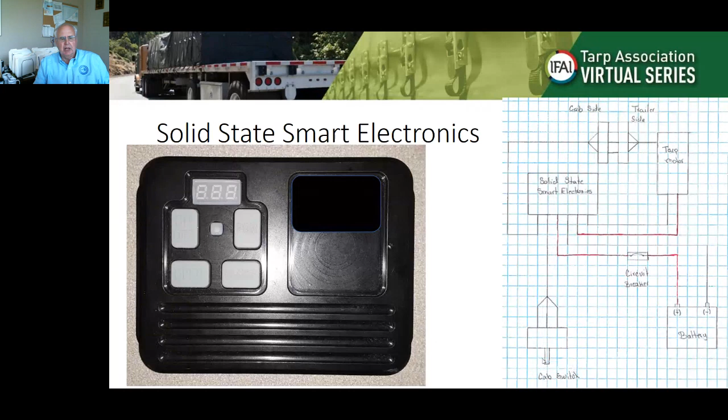Features that you might want to consider if you choose to purchase or sell one of these: you want a good distance for your RF control. You want an auto shut off feature so that if somebody accidentally gets on the button, it automatically shuts off. A feature you might want to consider is pulse counting through Hall effect sensors, and we'll go into that later, how that works. The ability to have an optional cab switch to control the system. Current sensing and adjustability—this is how we turn on and off as we sense the current.

The control board is sealed from outside, so you want it to be potted and weatherproof in a very tough cover. You want a robust motor and very good power wired connections. Solid state switching—you want to look for a MOSFET, so you really don't want any relays because they wear out. A MOSFET is just a bridge of transistors.

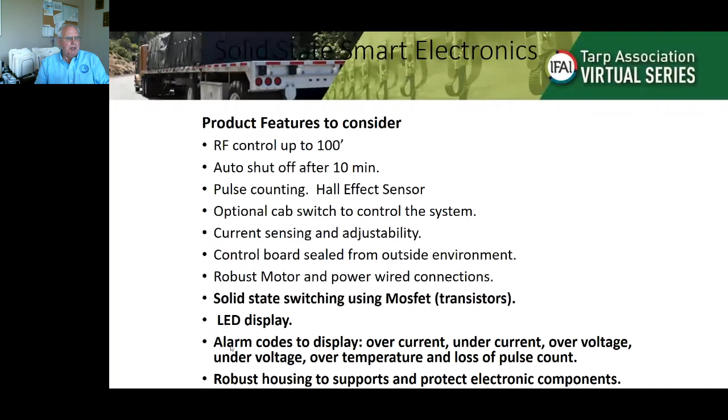You'd like to have an LED display that can tell you when things are going wrong and help you when you program. The LED display also allows you to see alarm codes, so if you're overcurrent, undercurrent, over voltage, under voltage, it helps determine the problem if you're having one.

So that's that. And then as far as advantages to explore when you're looking at these, look for something that's easy to install, with an integrated current sensor—you don't want a separate current sensor that you put over the wire because you can install that wrong, so you want that to be integrated. You want it to be easy to program. You want the error codes, as mentioned before, for easy troubleshooting of problems. You want the solid state—this is kind of redundant. You want good RF performance, and you want an RF handset that can work with multiple trailers for different customers that require that.

As far as the systems we'll talk about: side-to-side systems, front-to-back, roll-off container, rolling system, a glass covering system, cable system, and the high-side open-top flips.

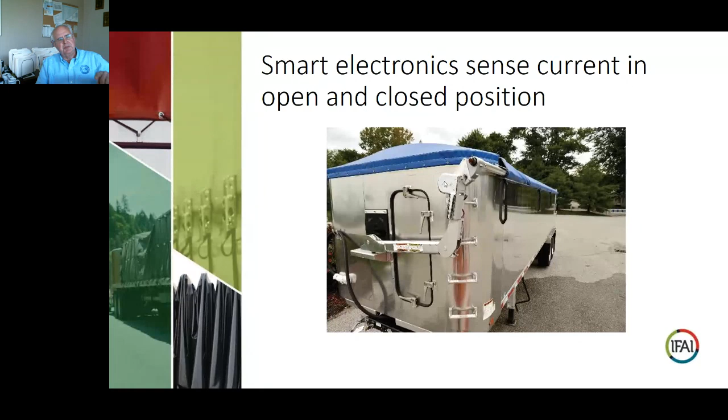The smart electronics here: when you go into a covered position, the motor pulls a lot of current, and we're measuring that current through our smart electronics. That's how we know to shut it off. It works kind of like your garage door—you push the button and it automatically either goes to the closed position and stops, or it goes to the unclosed position and stops.

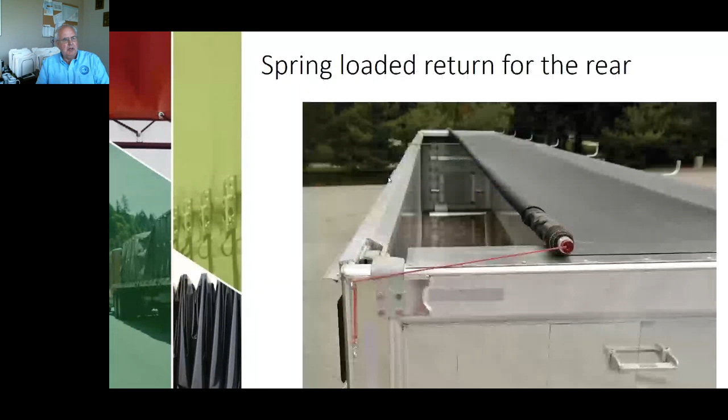In these applications everyone's aware, but this is a view from the side of the trailer. The arms of these have to be able to take a barn door. The spring-loaded returns are also kind of nice, and people are aware of those.

We also have our side dump applications. A lot of good products out there in the side dump market—about 90% mesh on this market, we estimate. The smart electronics does the same as it does on the side-to-side: it will hit that point where you start to spike the current, and once the sensor sees the uptick in current, it shuts the system off.

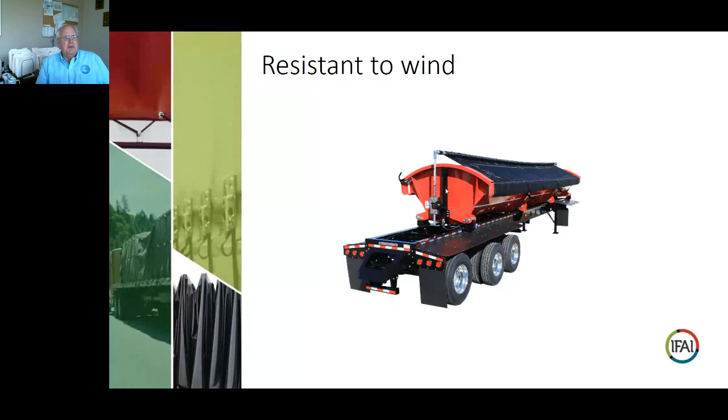You want to look for these guys that are wind resistant because they see a lot of wind, they want to pull them up. You make sure your system can allow dumping in both directions because people want to dump in both directions.

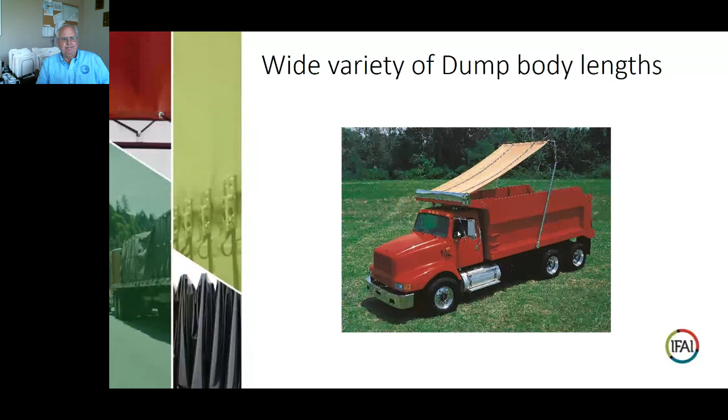On the front to back systems, wide variety of lengths. These things will go 53 feet for like a high side open top trailer. You'll have a front to rear for a 15-foot truck body.

On these it's a little different because when you deploy in the covered position, you don't have a current spike—there's really no difference in current for the motor. So what we do is count the rotation. Our electronics counts the rotations of the motor. The motor has a little Hall effect sensor, and then it has a rare earth magnet, and every time that rare earth magnet passes the Hall effect, it's counting the rotations. So when you program it, you let it know how far it needs to go out to be in the covered position.

In the uncovered position, you can fall back to the current sense. The nice thing about the current sense is when you got your finger on that button, you really create a lot of stress and damage to the tarp and the system. So by having the current sense, you never get that condition where you're getting really high torque out of the motor that's really damaging stuff.

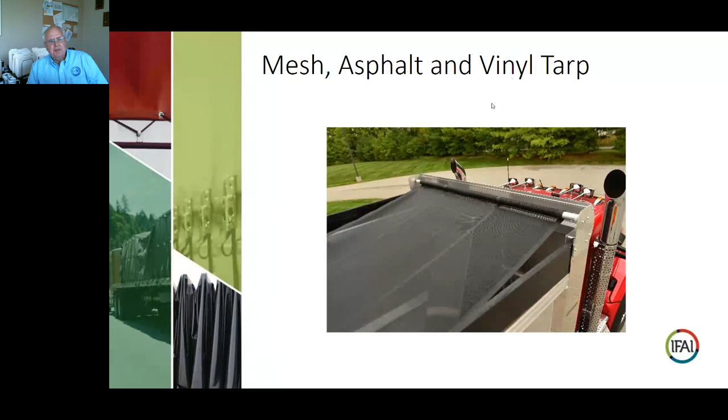So there's real benefit. On the front to back, you'll see mesh, asphalt, and vinyl as far as the tarp material. Also, you'll see a high mount.

One of the benefits of the high mount is through your mirror, you're not blocked on your view because of the arm. So there's a safety benefit. And we've also heard of loading benefits.

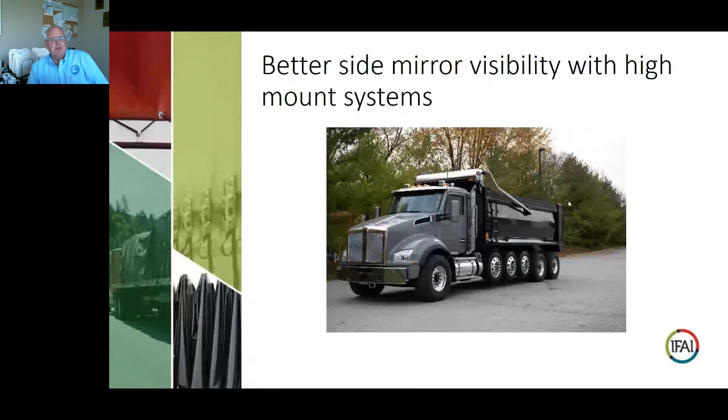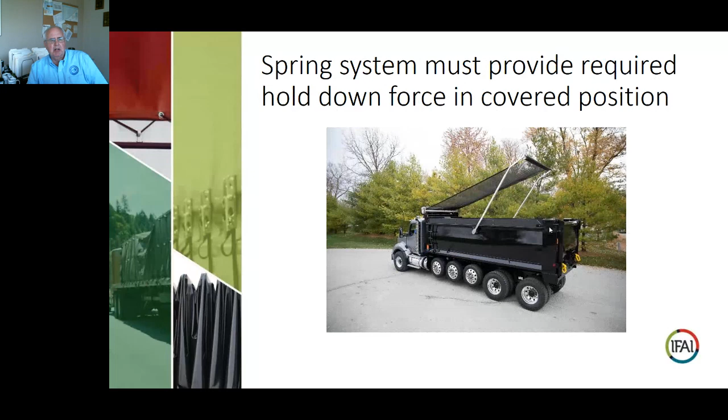Any other benefits? Did you say tension? Tension, spring tension—yeah, well, you want to make sure when you get one of these that you have good spring tension to hold you in the covered position so they don't bounce. So when you're in the covered position, when you buy these, make sure you get one that's going to give you lots of spring force so they don't bounce going down the road. Did you say visibility? I did, to the mirrors. Our vice president of sales was kind enough to join me, so we're having a little banter here.

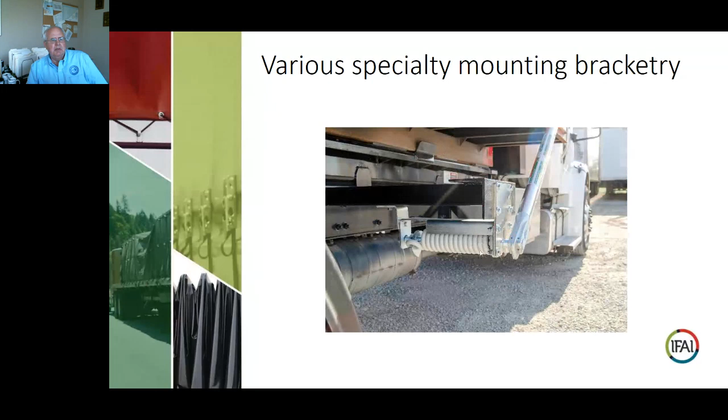On the easy covers, you'll also see the competitors offer an undermount spring. So you want to make sure you capture that spring on the back side. There's all kinds of different ways you can mount the undermount spring.

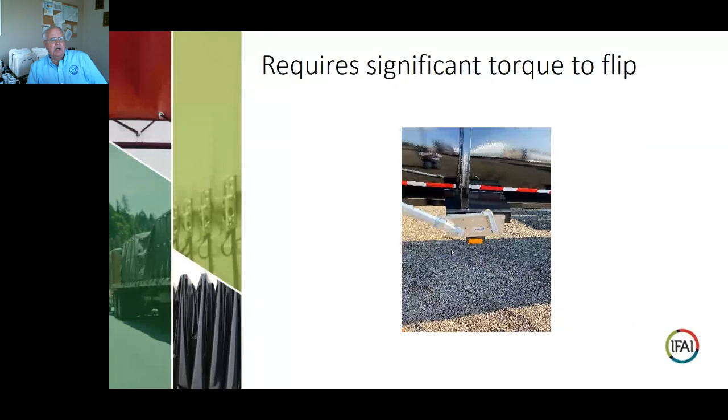We talked about the high side open top 53 footers—you need to have a lot of torque to be able to flip that arm. In scrap applications that we've seen, they're dropping all kinds of stuff on this, so you want to make sure whatever system you get looks very beefy, and you like the springs to be hidden so they can't get damaged when these big chunks of metal fall on the side of the trailer.

Roll-off container is another application. On this system, the slides in the tower are going off of a hydraulic power pack, and the tarp is going off of an electric motor. So we can use the smart electronics on our tarp.

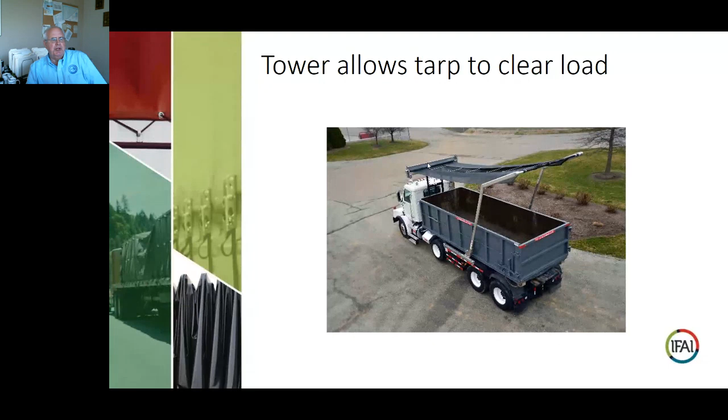The tower allows you to get the tarp up and over the load. When they operate these, they will operate the arms back and move the tower up when you cover. Then when you get covered, they bring the tower down and bring the arms in to tighten everything up over the bed so they don't lose stuff out of the can.

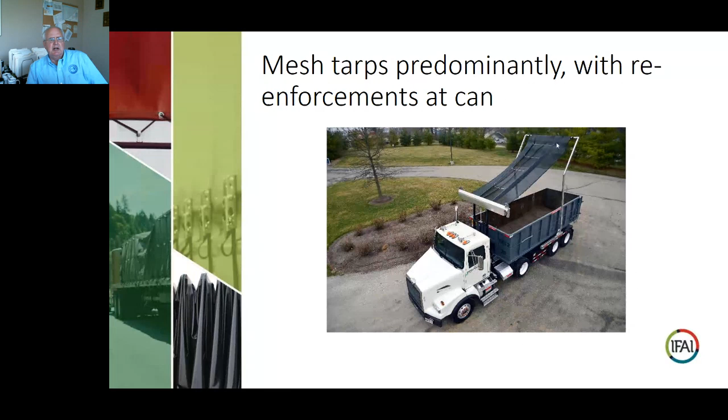Mesh tarps predominantly with reinforcements at the can—you'll see lots of reinforcements. These guys go over some difficult loads.

On these guys, the cable pulls the can up onto the truck, just showing the tower. And these guys slide back and forth so you can get positioned and get the tarp down tight, because they've got various lengths of cans that they're pulling on here.

On the rolling systems, you really need a vinyl tarp, and I'm sure we've got some suppliers on the call that produce some great material for these. But when we first started these, we used a supplier that had defects. And when you're making these, appearance is really important, and you really can't have defects in the roll.

This is kind of a story on these types of trailers we have parked in our lot next to these. These highly reflective sides on a sunny day will burn a hole in the tarp, so you don't want to park these right next to the sliding systems.

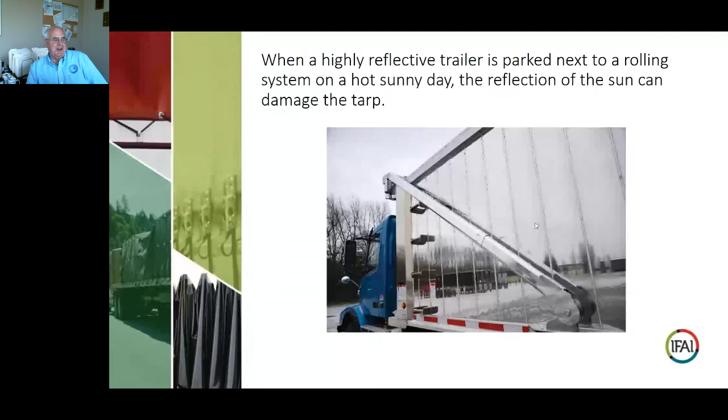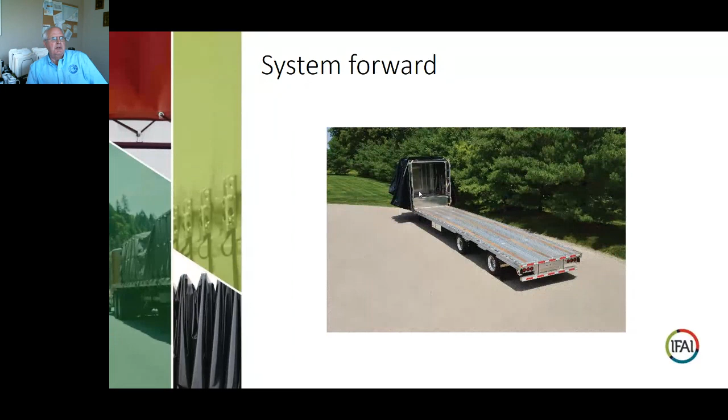These also come in drop deck models from manufacturers. A drop deck model will cover the top deck so that you can load a full load, and then it'll come back to allow you to load on the top deck. All suppliers want to minimize the droop to improve your payload height so you can get the maximum height.

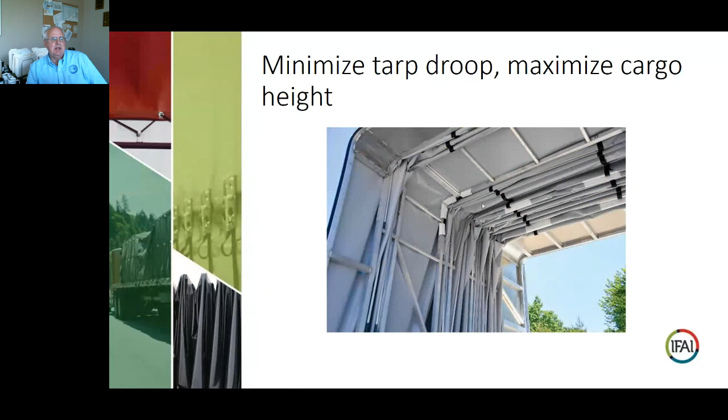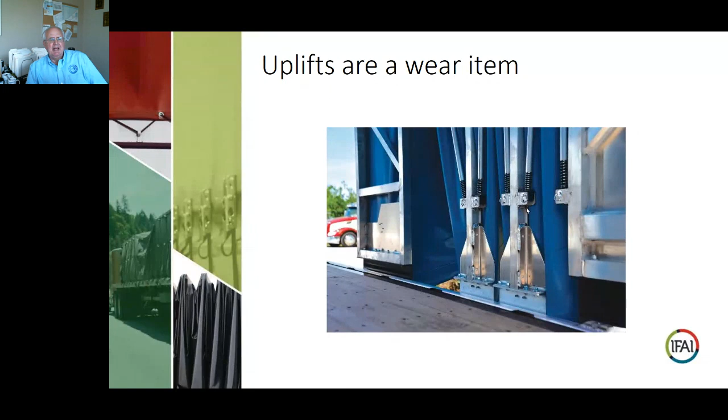A big wear item is the uplifts. Be aware that these bounce going down the road because they're supporting the tarp at the top, and they typically tend to wear out, so be aware of that when you purchase one of these.

These are offered in two types of rolls. There's a roll that goes on top, giving you the most cargo capacity - this view shows skylights, and manufacturers have different types of skylights. There's also a pull curtain, which doesn't give you quite the load capacity on height, but it is easier and quicker to operate.

We offer a Department of Transportation bulkhead, which is rated to take over 80,000 pounds of force. We also offer non-DOT bulkheads - any bulkhead with a door is a non-DOT. We also have a DOT-like bulkhead that's offered for safety.

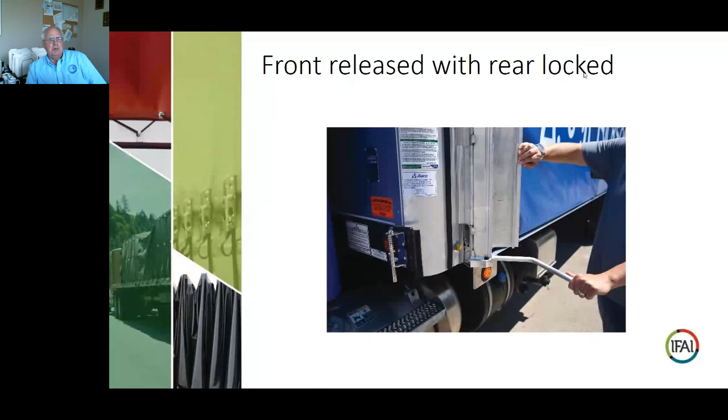When you look at these, you want to have a quick front lock latch to release, and you want to be able to release without releasing the rear. In the rear, you typically want a quick action so the driver can get this done quickly and get to his next stop.

Also, you want that lock to travel with the car because it gives you more load access from the side.

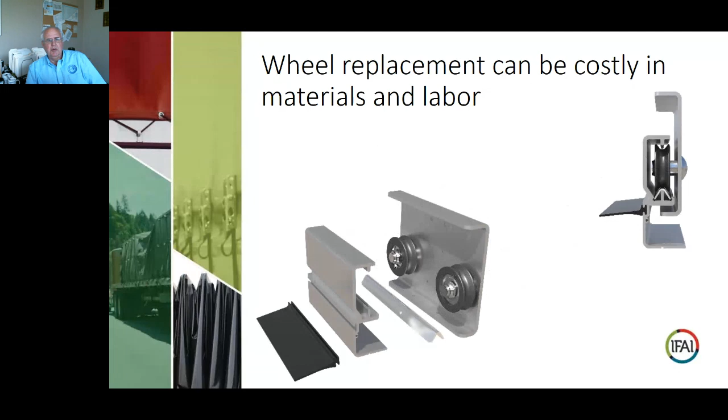As far as replacement parts, talking to our customers, wheels are kind of a problem child for these systems because they wear out and have to be replaced. So you might look at the material of the wheels and what kind of lifetime warranty somebody might give on them, so you don't have to be changing these out every year.

Rear tarp clamp to be able to adjust the tarp.

So that was that. And then this is an application we call a glass hauling trailer. When you haul glass, you can't get any water on it, because if the glass gets water on it, it sticks together and can't be used. So it has to be completely watertight.

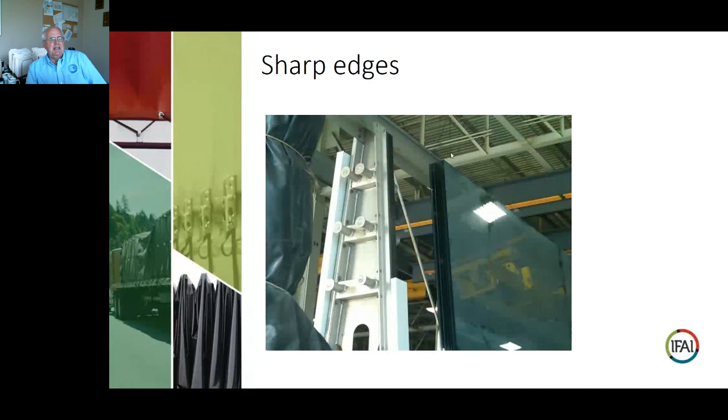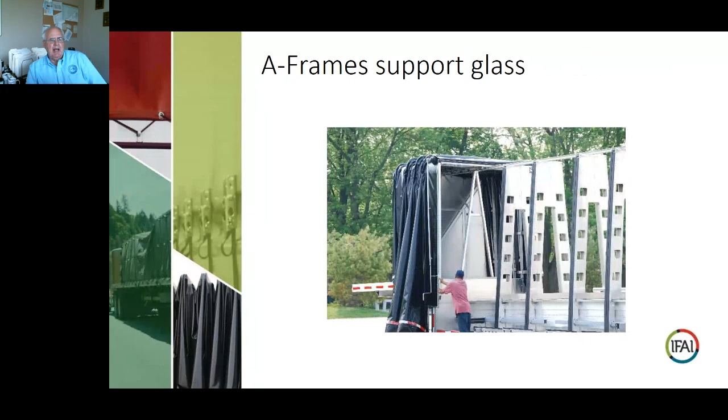You can see they have very sharp corners on the top that can cut the tarp, so these are all vinyl tarps. You can kind of see that the trailers are all custom to haul the glass, and they're outfitted with the A-frames. The tarp can't touch any of the glass because it'll cut it. You can see the track on top of the A-frames that supports the tarp.

It's a tight clearance - you've got to manage the tarp to get it over top of the A-frames and the glass. And you need to maximize your load access.

This just gives you an idea of what a manual tarp looks like. They're tied down at the bottom here - I think they call this a diaper design, but it takes a long time and it's really dangerous. They talked about falls - guys had to climb up here to tarp this thing, so it's very dangerous to do manually.

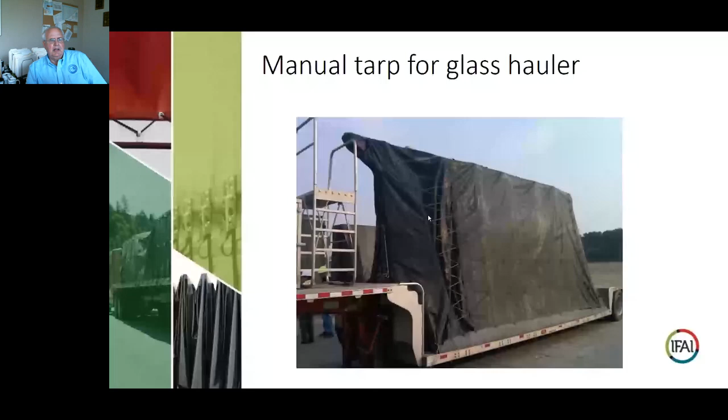You want to look for a low friction polymer glide system that's easy to replace, so you don't have to take the bows out of the tarp. If a bow wears and gets sucked down, or gets bent when they dump and pull a vacuum without uncovering, it's quick and easy to replace these without removing the cable.

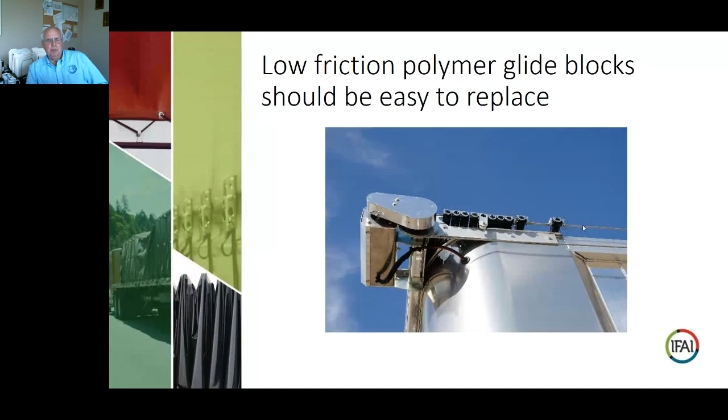There's the rear idler. These are mostly mesh and vinyl tarps, and they'll have differing degrees of how far they go over the side of the trailer. The maximum is a 6-inch drop to try to keep water out, and companies will do whatever they can with extensions over the rear so water doesn't get in.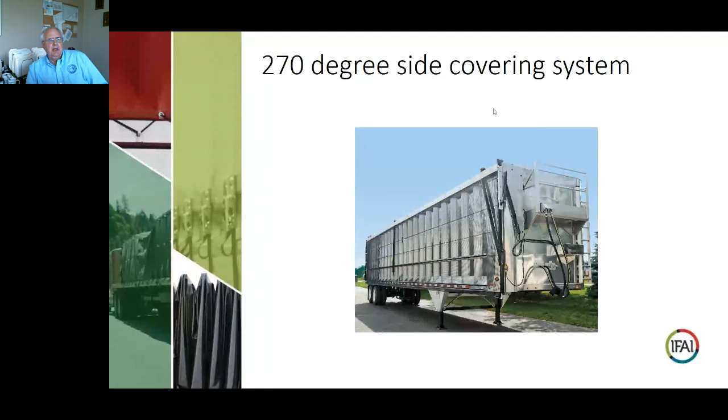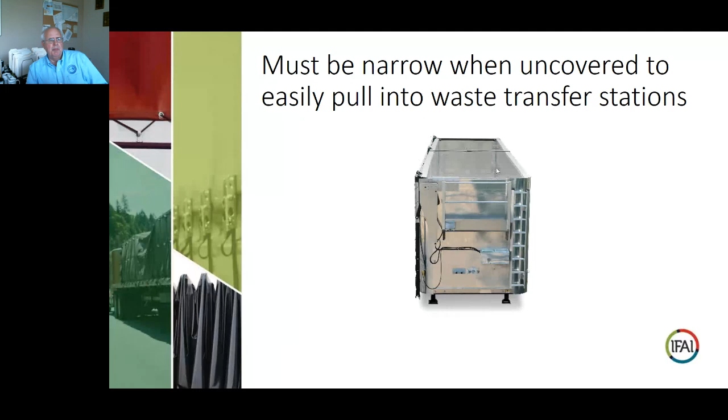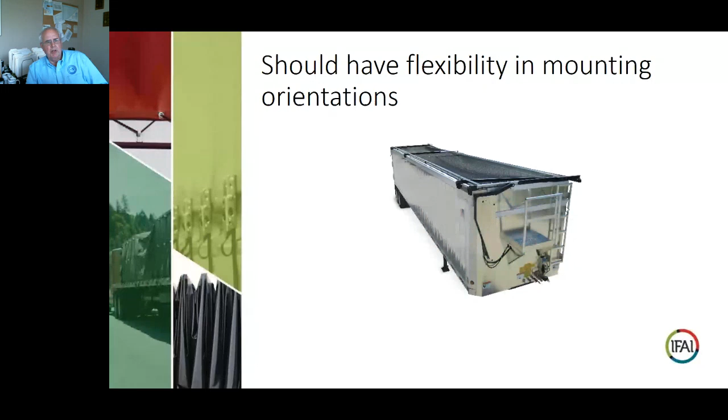Then another covering system is a 270-degree system—we sell these high side open tops. You want to keep a narrow open position because a lot of these are going into transfer stations to get garbage and then go from the transfer station to the dump. You want flexible mounting so it can mount on either side of the trailer, since sometimes there's a ladder on one side or the other.

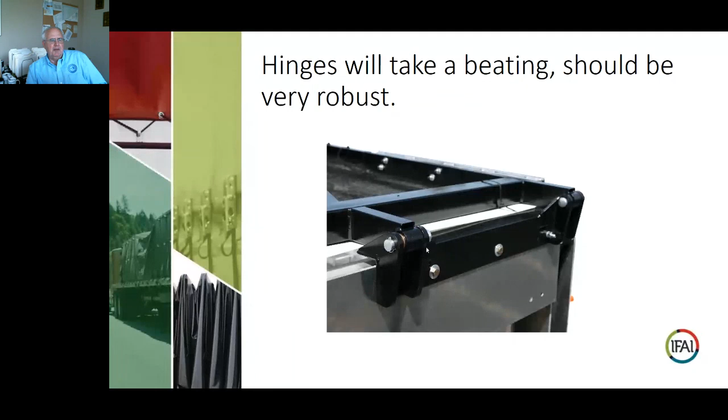This is all powered by a hydraulic power pack to flip it. Several manufacturers make these; we use very heavy duty mesh. This is punishing because front end loaders are loading these and they just smash them, so this is half-inch steel on this one. When we went out in the field and looked at competitors versus ours, these really get smashed up by the loaders.

Before I give it back to Aaron, I wanted to share more information about our automation here at Aero. On our tarp floor, many years ago, we went with a cutting table CNC—it makes a huge difference.

We've got RF traveling tables here and in Kent, Ohio, and as said by someone else, they're very helpful for efficiency. We've got two Miller 112s, great for hot air welding. We also have a giant automated Miller product to automatically make tarps that can cross seam and put in grommets—it's quite a monster.

On the fabrication side, we've got an Elumatec 4-axis that's 20 feet long for long extrusions, quickly putting in holes and slots, and a Haas 4-axis for larger things to quickly machine. We've got a Trumpf laser, robotic welding we've had for about 15 years, a CNC tube bender for bending our different extrusions, and a 30-inch upcut saw that cuts a stack of aluminum in an instant.